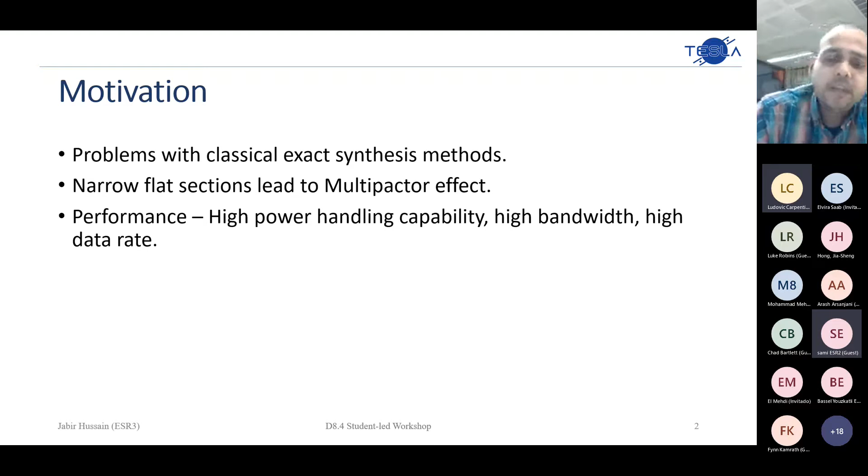Finally, one of the key requirements for future telecommunication demand is high data rate. So this necessitates a high bandwidth, which in turn requires the satellite payload like filters to be designed for high power handling capability. So with these key reasons, the objective of our research work here can be defined.

So we need to develop a novel design methodology based on direct synthesis. Direct in the sense that it does not require the use of any intermediate lumped element network models to design the filter. The design method needs to be oriented towards direct metal additive manufacturing through SLM, selective laser melting.

The reason behind targeting additive manufacturing as the fabrication method lies in its capability of easily fabricating complex geometries. So our synthesis technique will produce filters which will have smooth variations. These smooth profiled structures are not very suitable to be fabricated using conventional techniques like CNC milling and so on.

Moreover, the design methodology needs to be general in the sense that it can be implemented in any technology and for any causal and passive frequency response. The flexibility of the synthesis technique should also allow us to design not only filters, but also pulse shapers, matched filters, differentiators, and so on.

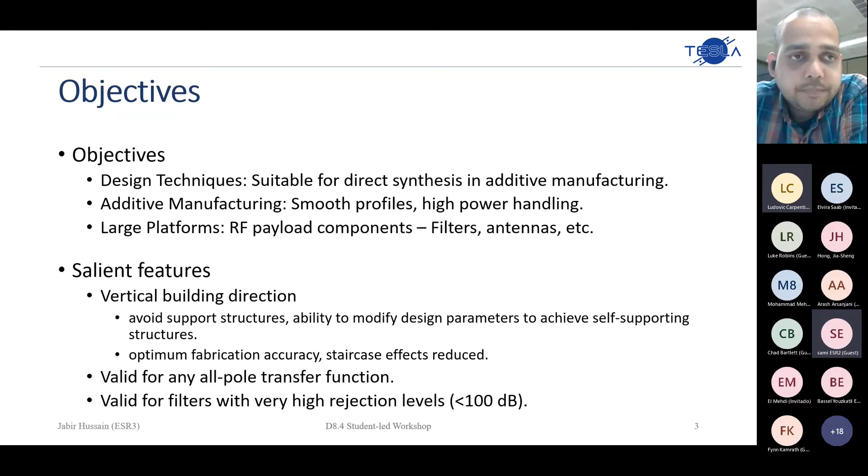Before I move on, I briefly point out the theoretical background. We mainly use the inverse scattering technique to generate the coupling coefficients from a required specification, and then use coupled mode theory to generate the design parameters from the coupling coefficients. I'll not go into the details of this theory, but I'll briefly show you the general design procedure, the general flow of the synthesis technique.

The first part involves generating the transfer function from the specification. So this involves obtaining the unit elements prototype in terms of their characteristic impedance. These unit elements are then interpolated to produce a smooth profile. Using these modified unit elements, we generate the required transfer function.

So here you can see from the modified unit elements characteristic impedance, that is Zi, we get the transfer function S11. Next, the coupling coefficients are generated using the inverse scattering technique. So from S11, we get the K(z). And finally, based on these coupling coefficients, we can obtain the device parameters using coupled mode theory.

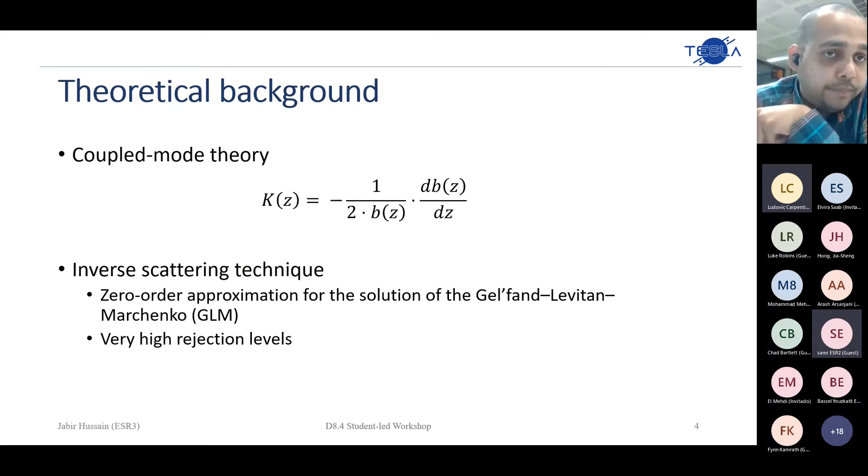So from K(z), we get the design parameter, in this case the varying height profile of the rectangular waveguide. You can see this will be the equation. It shows the relation between the coupling coefficient and the height profile, which is b. Now, obviously, this synthesis technique assumes the propagation of only the fundamental mode. And so we also developed compensation techniques to reduce the effect of higher order modes.

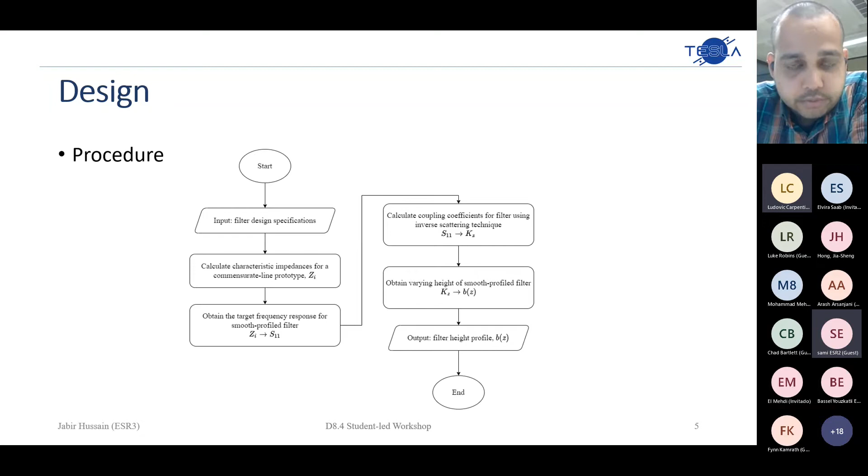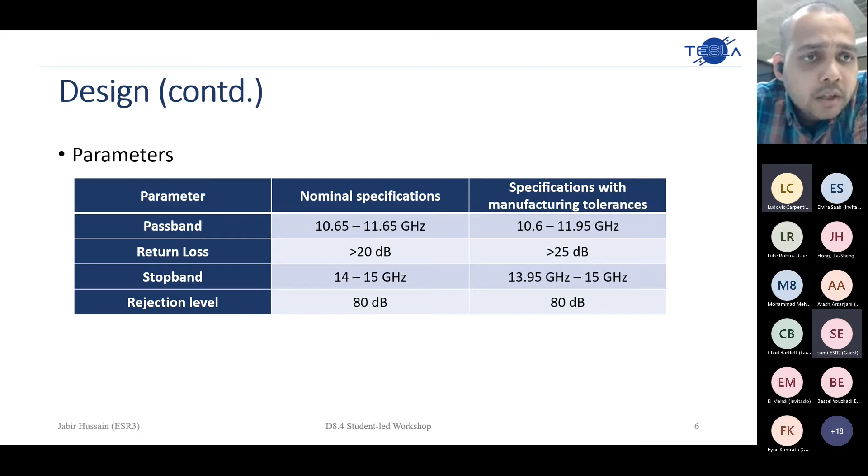These are the design parameters for the low pass Chebyshev filter which we have fabricated, as one example. As you can see, we have kept a comparatively very high rejection level of 80 dB for the stop band of 14 to 15 gigahertz, which is supported by our synthesis technique. So based on the design synthesis technique which I have shown, these are the single mode results. It satisfies the specification with the manufacturing tolerances.

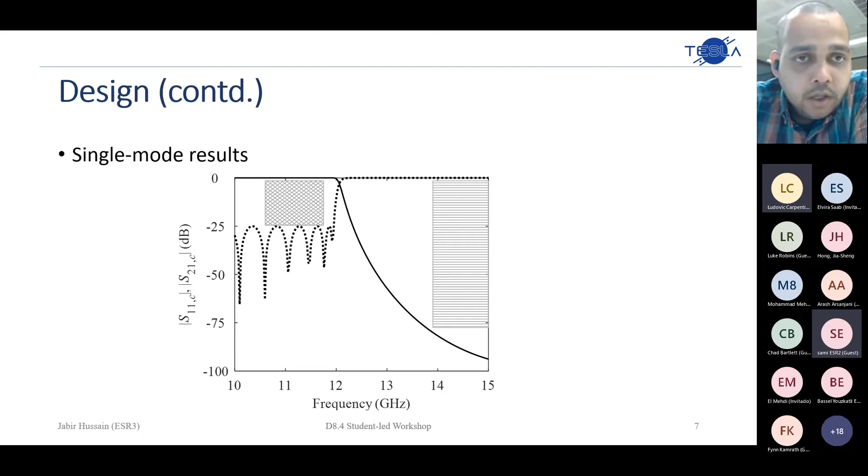However, when we do the full 3D simulation, we notice the effect of higher order modes. It gets coupled, and moreover, when we designed this, we saw that the maximum height was very large. So this was also a reason why we got the effect of higher order modes. And since the height was very large, it was not suitable for vertical fabrication. So what we did was we reduced the height of the filter, but to maintain the standard ports, we used the tapers.

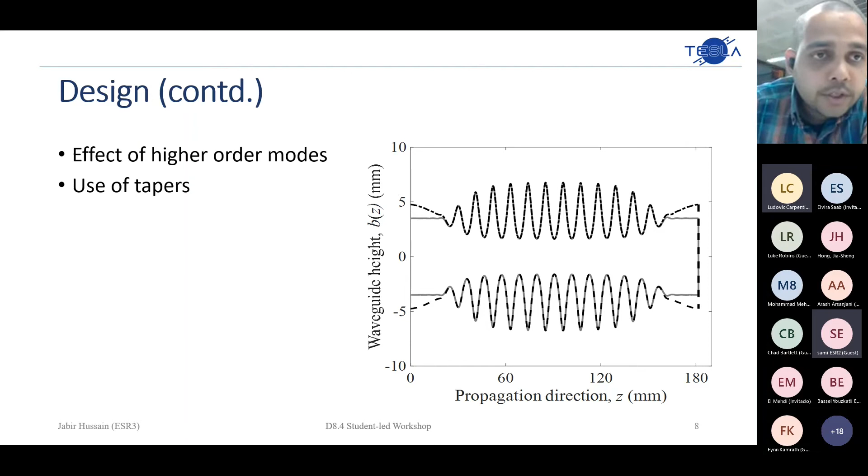So this was what I was talking about, that even if our design synthesis gives us a filter profile which is not suitable for vertical fabrication, we have this method of introducing tapers so that the fabrication is in the vertical direction. So once we introduce the tapers, then we did the full 3D simulation. We get these results. Obviously, we have to do a compensation for the higher order modes.

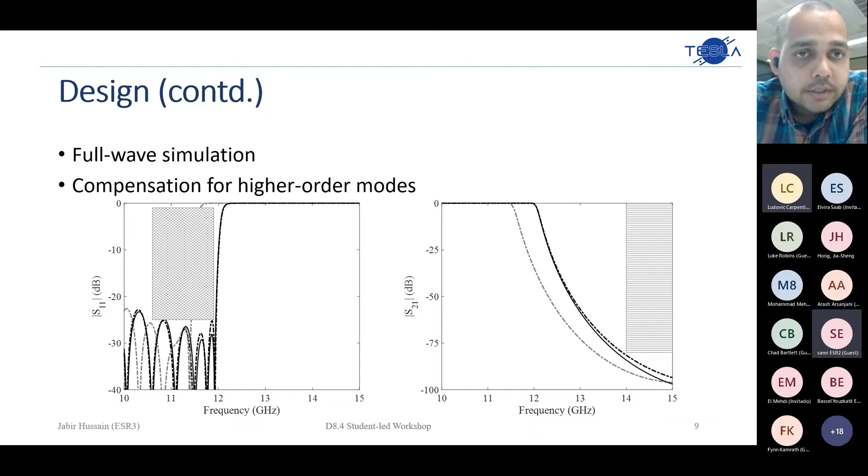Here you can see the black dash dotted lines is the single mode analysis. This was the initial analysis. Then when we did the CST simulation without the compensation, we got the gray dash dotted lines. So this was the effect of the higher modes. And finally, when we introduced the tapers and with the compensation, we got the black solid line. So this was the design procedure. And because our main focus was high power handling capability, we moved on to the high power simulations.

This is the Spark3D simulation of the filter prototype. As we can see, it supports a very high power of around 300 kilowatts. We have done this simulation keeping around 1e9 electrons per meter cube. But even if we increase the initial number of electrons, the breakdown usually hovers around this 300 kilowatt region.

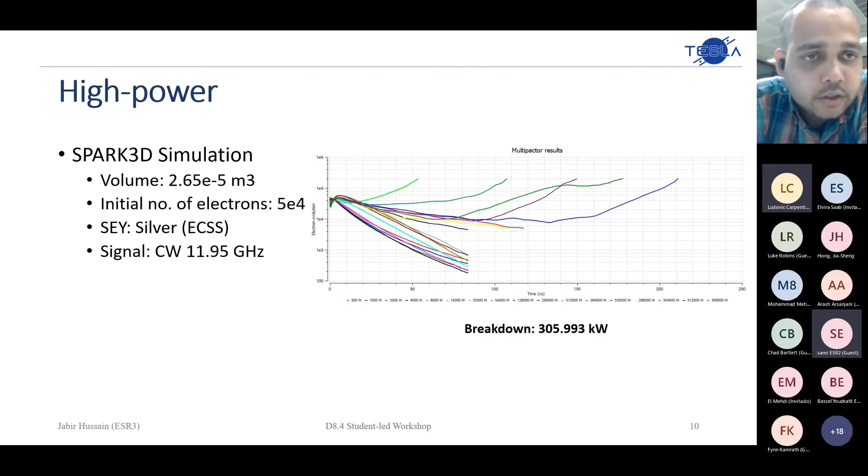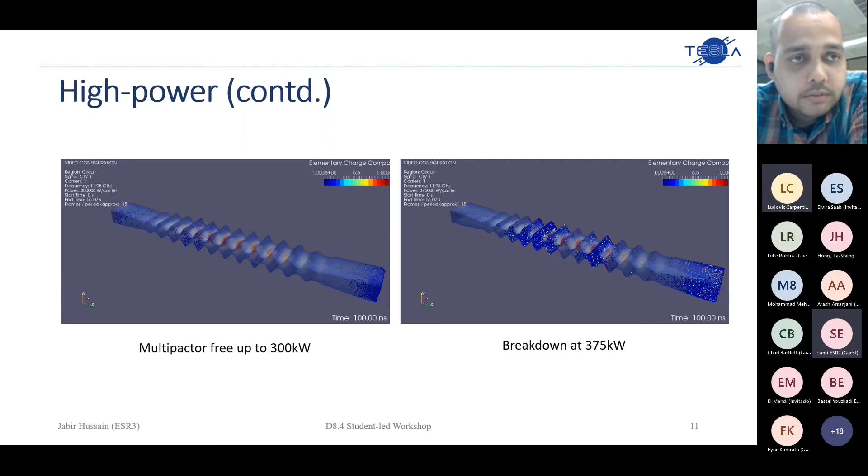I show you a short video to signify the breakdown location. In this one, where the input power is 300 kilowatts, we see that there is no breakdown till 100 nanoseconds. However, when I increased it to 375 kilowatts, there is a breakdown. And as expected, it occurs near the minimum gap along the smooth profile. So somewhere here. So since we are satisfied with this, we finally went for the fabrication.

So these are the fabricated parts. In the top, it is the pre-plated one. This was done using direct metal laser sintering, and the material used was the aluminum alloy, AlSi10Mg. The usual post-processing methods like sandblasting and polishing of the flanges were applied, but there was no need for any support structures. So we did the final silver coating.

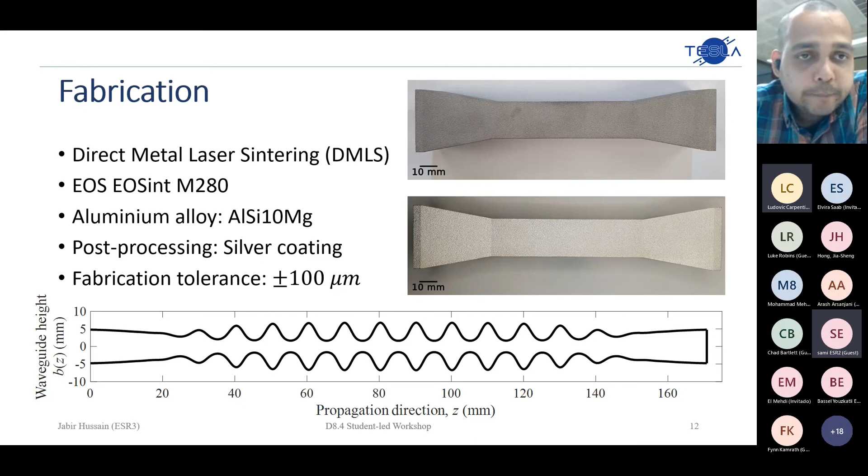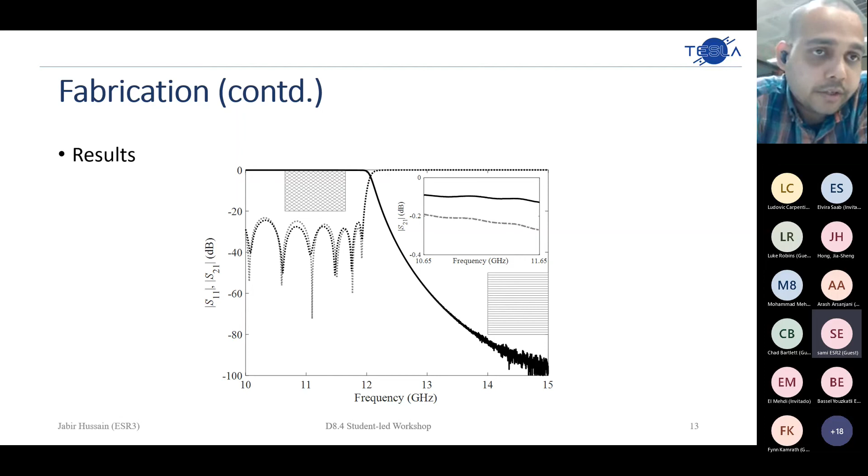And yeah, these are the results. It satisfies the specifications which we had in our mind. The inset shows the improvement in the passband after silver plating. So usually we got around 0.2, but with the silver plating, there is a marked improvement. And that's all. If you have any questions, feel free. Any questions?

So I have a question for Jabir. Yeah, go ahead. Can you hear me? Oh, okay. So I'm just curious, did you mention your building orientation, or when you were printing your structure, did you print the whole structure in one piece? One piece. I can show you, if I have it nearby.

So this was the filter. This was vertically fabricated, so it was one piece. I hope you can see it inside. Yes, I can. Just what was your building orientation? You said you put it just like this, right? Yeah, it's vertical. We also tested an inclined orientation, just for testing purposes, but for other prototypes. But this was supported vertically. There wasn't any problem with this.